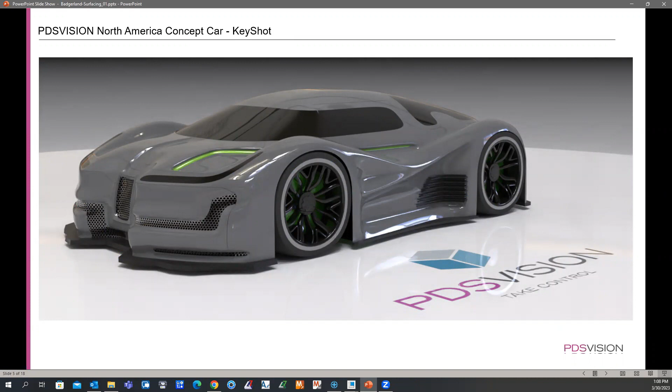This was developed by myself, but we are going to use this car model for the creation of material for workshops, potentially training in the future, presentations, a whole bunch of stuff. But this is the model developed within Freestyle. Here's a rendering of it within Keyshot. What's really nice is I have the plugin in Creo, so once I get the design in Freestyle completed and trim it out the way that I want, I could add the materials in Keyshot and give it this realistic look that you see here.

It's called Freestyle for a reason, because just like you've heard about freestyle singing and rapping, it's kind of like this fluid, intuitive thing where you're just trying to iterate and model off the cuff.

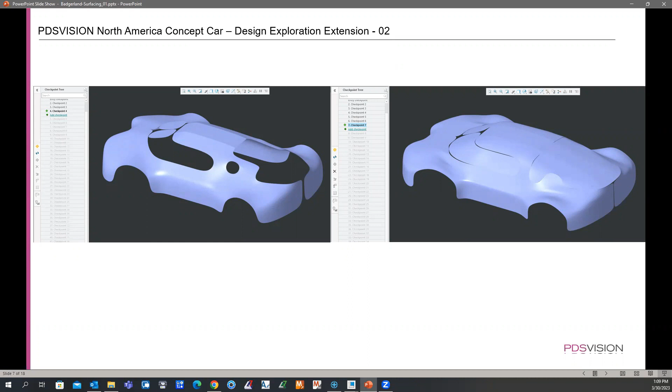So there's the next stage to the left, where I started to get an idea of what the front end and rear of the vehicle are going to look like, and the windows on the right side. You can see I sculpt it further, and the design gets more fleshed out as I go through pushing and pulling and modifying the surfaces. That's the finished one there to the right.

We know that typically, whether it was in the ISDX feature or just using curves and blends within Creo, we would create those curves first, create our patches between them with the boundary blend, then modify those curves to modify the shape. But in here, you're literally just selecting and dragging.

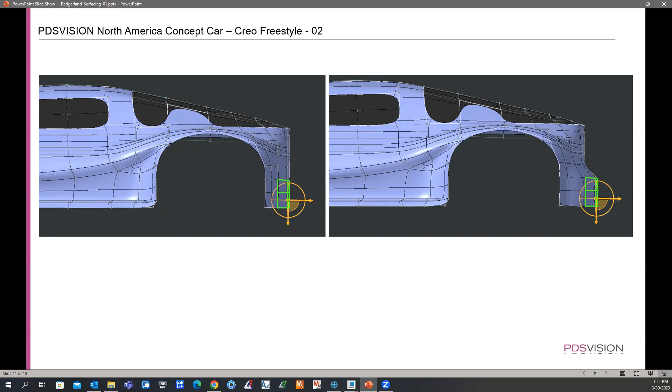Here's another example in that door area of the vehicle where we've selected a face on the left, and in the right image, we're using those drag handles again to push that inward to modify the shape there.

What's nice too is that once you've completed the shape in Freestyle, you can use those surfaces. So if I want, I can say, hey, I want to trim out that vehicle in the shape of the door there, and then publish it, so you can trim out the different parts of the vehicle or whatever it is you're creating.

And then if you want to modify that in a different part, for example in this part we call it door, we publish that geometry out, go back into that new part, and copy that geometry into the part. As you can imagine, it will inherit the original geometry from that Freestyle part.

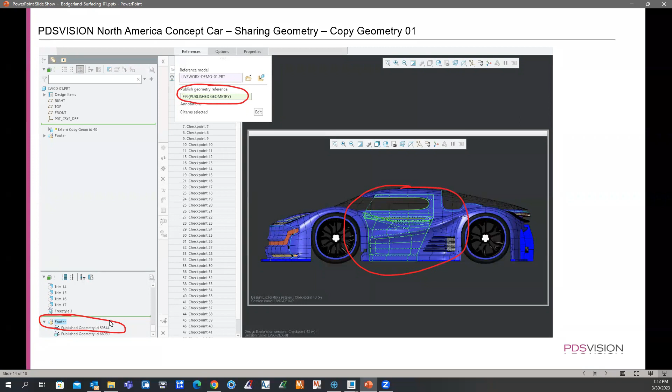At some point along the design development process, you may want to break that link, the associativity between this part and the original one. But at the top, you can see we copied in that published geometry, and we got it from the footer of the original model in the bottom left.

Once we've shared that geometry, you can see we can copy those curves from the Freestyle mesh. That copy geometry you see on the left side is what we use to get the boundary curves of the door. And once we have that, I can take it to ISDX if I want and flesh out that door even more.

So that's what I have right now, and I'm going to move into the demo to show you how that's done.

All right, so this is the CAD model of the vehicle right here that you can see. And also we have this design exploration session tree, and this is really nice because it can get annoying to do a hard save on different versions of a model. So you can see I've got about 44 of them.

I have the original one. If I go to checkpoint 2, activate that, click OK — that's what I started with. I started off with that cube in Freestyle. If I just go down the line here and activate these different checkpoints, you can start to see how that shape is evolving throughout the design process. There's another version of it. I'll just go to the last one here and activate that one.

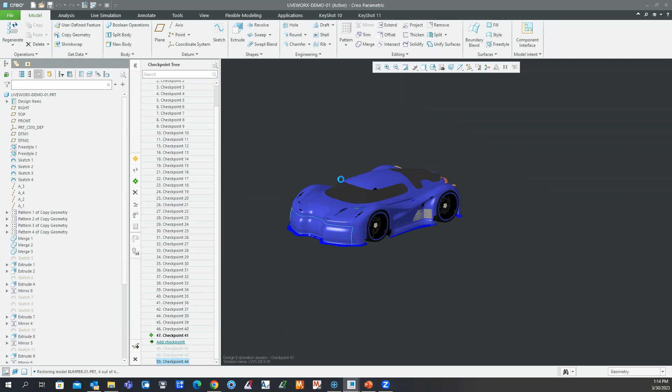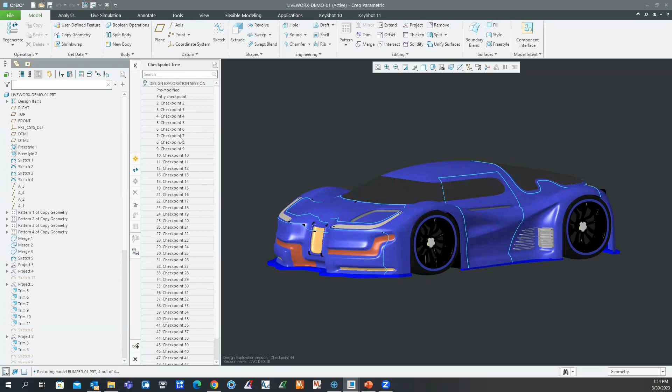What's nice about this is it gives you a free form environment, so you're not having to save different versions of the model. All the versions you've been working on are contained within this one part file. It gives you a more organic, free-flowing approach to developing the part, and it's easy to look at where you started and where you ended up. If you decide the product is finished, but there's a version of the vehicle where you liked the body even more back at some point, you can just go back to that checkpoint and start working from there again. So it's flexible that way.

So what I'm going to do is go right into freestyle and show you around there. I'm going to go back into the original checkpoint here. Checkpoint 2.

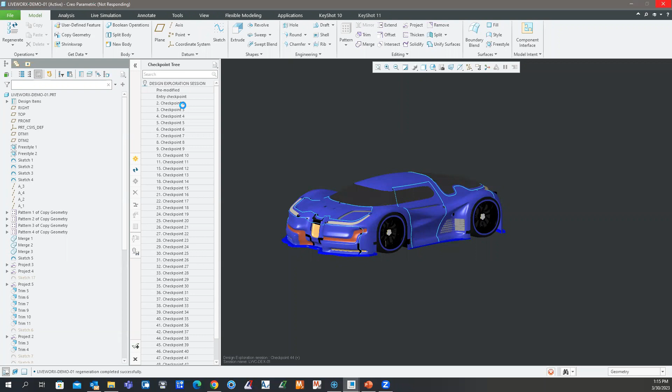So there's the cube, and that comes from this freestyle feature. Edit definition on that - this is the freestyle environment, pretty simple. We have our ribbon at the top, and we also have the freestyle tree down here to the left. You're going to start off with these primitive shapes. In the shapes group, there's the sphere, cylinder, torus, and we also have the cube. In this case, I selected my cube and started off with that.

Notice that when I hover my mouse cursor over this geometry, it allows me to select different parts - there's the face, the edge, and the vertices as well. Also notice I get these drag handles where I can translate the vertice, for example, select the face, rotate that face, spin it around.

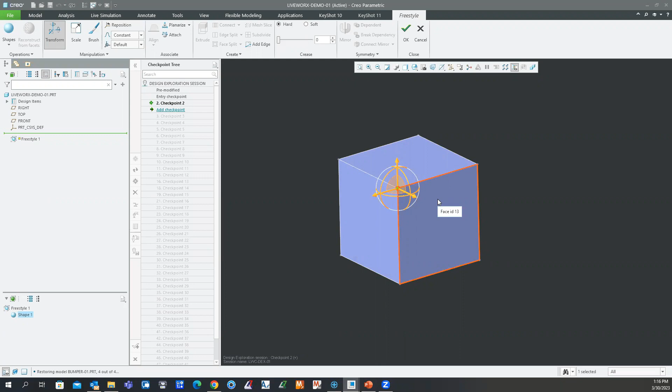We're used to creating sketches, modifying dimensions, that kind of thing. So for people that haven't used it before, this is a different way of working. But once you start playing around with it for a couple of weeks, you'll start to catch on. This is the original shape right here, and it's pretty intuitive and responsive as well.

If I select that face, I can drag that face out, for example. I can also extrude it - if I want to add geometry to this, I can right click and say create and extrude. Now you can see we've just added more geometry and subdivided the model even further.

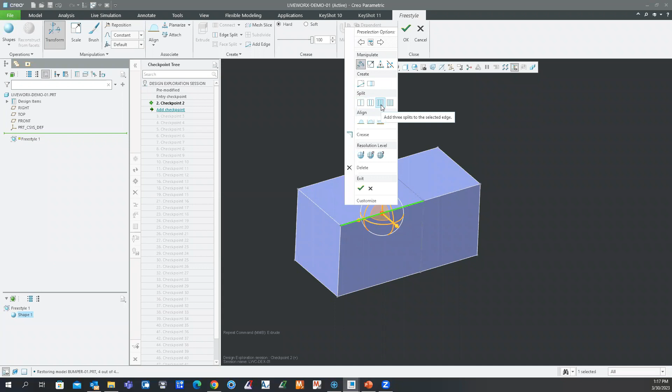I can subdivide it by selecting an edge as well. So there's extrusion, but I can also split the model further and subdivide it by grabbing an edge, right clicking, and saying split. I can split with one loop, 2 loops, 3 and 4 in this case. I'll grab 3 - now you can see we've subdivided that, so now I have more geometry to work with to modify the shape.

So I can grab that face there and pull it up, and see how easily I can start to modify that shape. I can split this side as well, right there, and I may even want to split it in this area. So I can grab that edge and subdivide it.

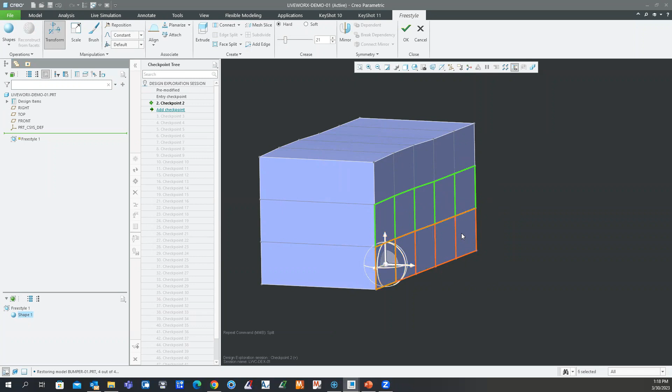Here's where I can start grabbing geometry - I can just grab these faces and start pulling that outwards.

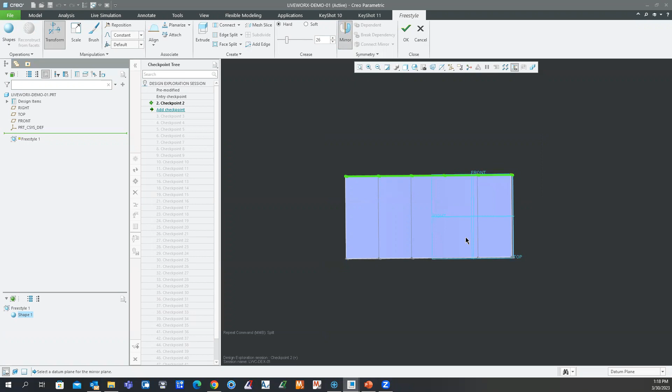Now there is a mirror feature as well. So what I can do is turn on my datum planes, grab one side of these vertices here, and then up in the ribbon there's a mirror feature. I can select that and say I want to mirror about this right plane. Now that I've done that, I only have to work on one side of the model, which really saves time. It's a lot better than having to try to mirror yourself manually - that would just take too long and be too hard.

So in this case, now I can grab these faces and start pulling that out, getting the shape that I want.

I can grab these as well, like that. And then pull the back.

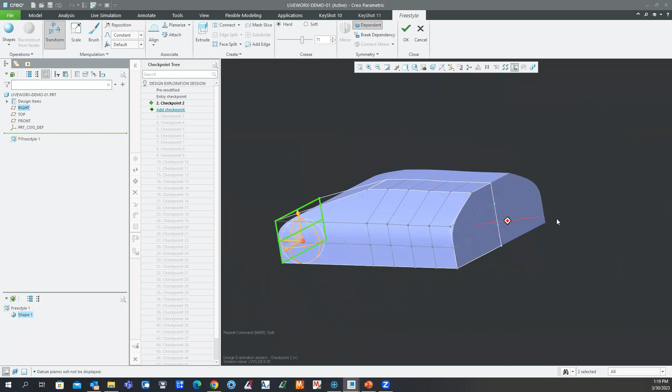I might want to subdivide this. There's also a tool where I can basically draw an edge in here, so there's the create edge between vertices. I can grab a point and connect between each one of the edges here with the edge I'm creating, then complete that. And now I can take this guy here, take these faces, and pull that out.

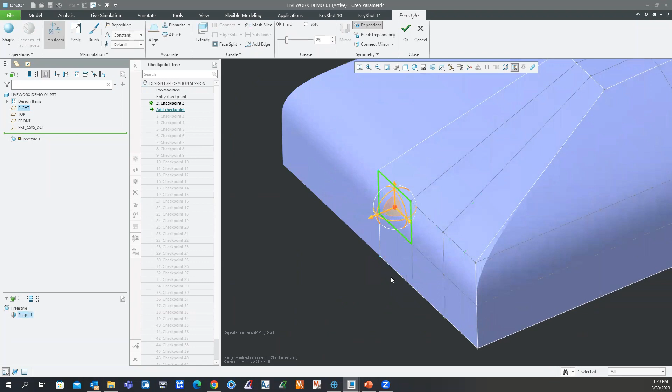So you can see here that you can quickly start to play around with the design ideas that you have for a vehicle, for example, or something. So I can grab this one and pull that out, right?

What I also like about this is the ability to connect and join geometry. So for example, if I grab this face and extrude it upwards, and maybe grab this one, subdivide that, and grab this face and extrude that, and maybe I'll just split these here. So let's subdivide that.

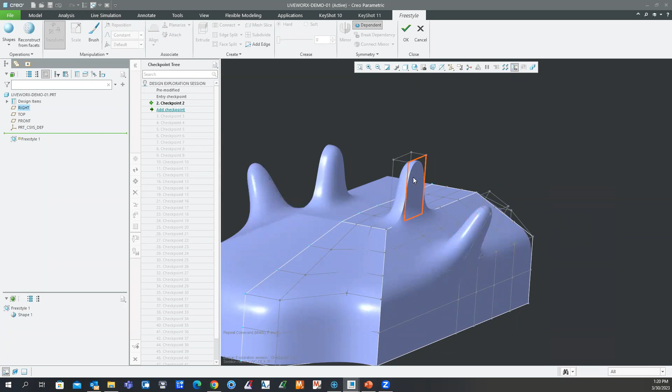Okay, so now if I wanted to join geometry, for example, from this face to this face, I can select both of those, right click, and say connect. All right, so that's very powerful. You can think about creating a handle or any other kind of geometry where you need to have this ability.

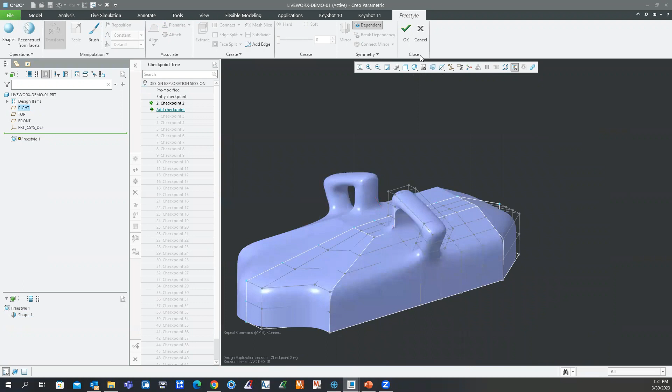One thing that I also like is the ability to merge or align geometry to sketches. So I'm going to go ahead and delete this one, and we'll go ahead in here and create a sketch. And I'll hide this one for now.

So a lot of people always ask, yeah, that's nice that you can sculpt, but is there any way to make it somewhat parametric? And I tell them yes. So that's what I'm going to show you right now.

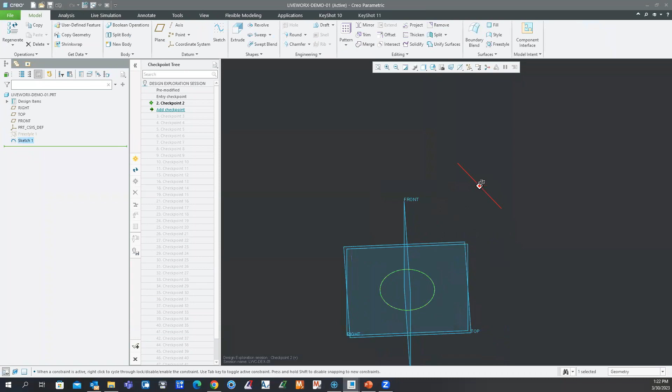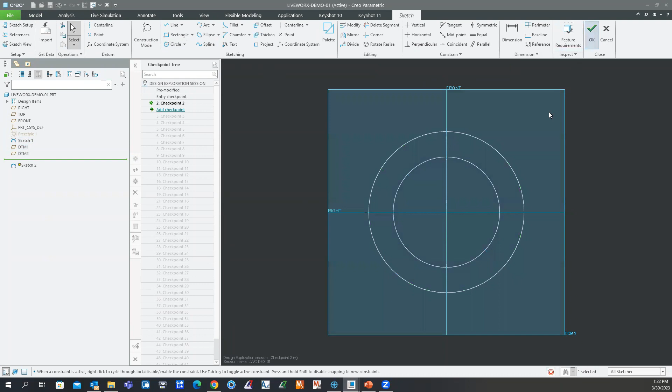Let's go ahead and offset a couple more planes. This will just take me a second. And I'll grab this last one here.

Okay, so if I were to go in here now and create a new freestyle feature, maybe this time, if I was to make a vase, for example, I could use a cylinder shape and rotate that around. Maybe I'll keep the bottom, and let's take this face and extrude that upwards to here. Okay, so I'm going to hide these planes.

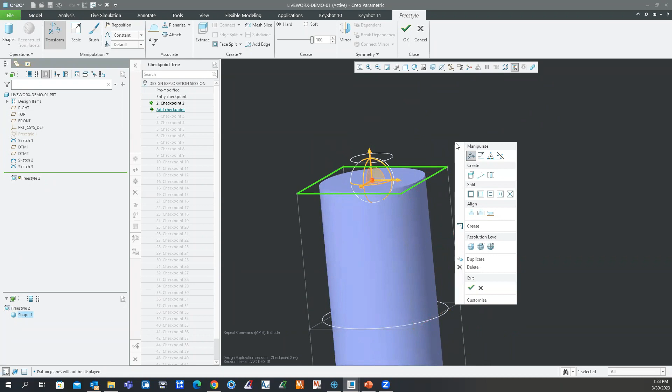So what I'm going to do now is I'm actually going to take this face and delete it, so now we have a hole in the top, right? So what's neat is I can grab all these edges and right click and say align, and I'll just choose the align normal here, and grab that sketch. Now you can see I've aligned that sketch or that freestyle mesh to that sketch, right?

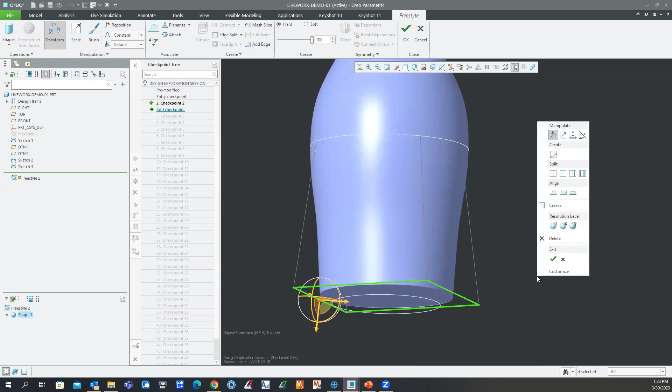I can do the same thing here. I can grab the edges and align it to that sketch, and change that to normal position right there. And then same thing down here, I'm going to grab these guys. Didn't like that one for some reason here. There we go. Okay, so there it is.

There's that vase that I've got here. So what's neat about this is now that I have that shape, I can go back in here to my sketches, for example, and modify these dimensions. So I'll grab that one, maybe change that to 80. And that mesh is going to update based on those changes that I make to the dimensions for those sketches.

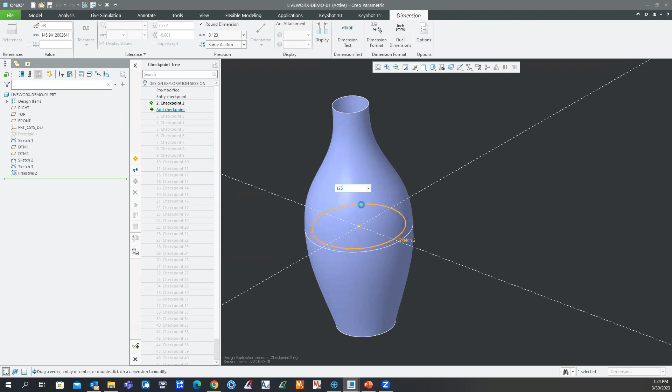And there's sketch 2, same thing here, and I'll change that to maybe 125. So just wanted to show you guys that you also have a little bit of parametric control there by linking the mesh to sketches. You can also do the same with planes: if you have planes that are offset, you can align the freestyle geometry to those planes, then if you modify the offset dimensions for those planes, the mesh will update as well.

Okay. So now that I showed that, I'm going to go ahead and get rid of some of the stuff here that I created. All right, I'm going to turn this guy back on.

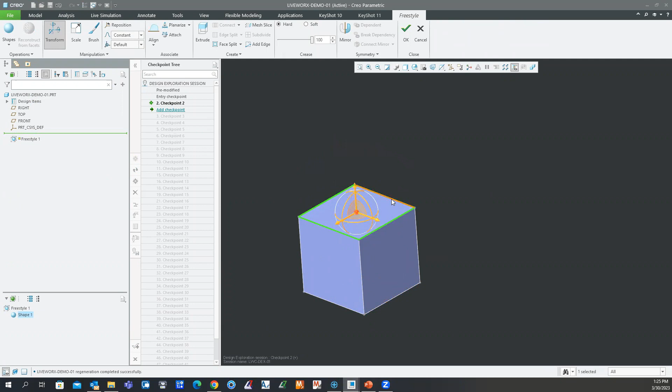Okay, so we talked about the primitive, bringing that in, selecting the faces and pushing and pulling. I can grab an edge as well, and push and pull that. I can grab the whole shape if I wanted to, and scale it, so I can right click and say, you know what, this needs to be smaller. And I can grab one face if I wanted to, or grab the whole thing, make sure it's uniform, and scale it like that.

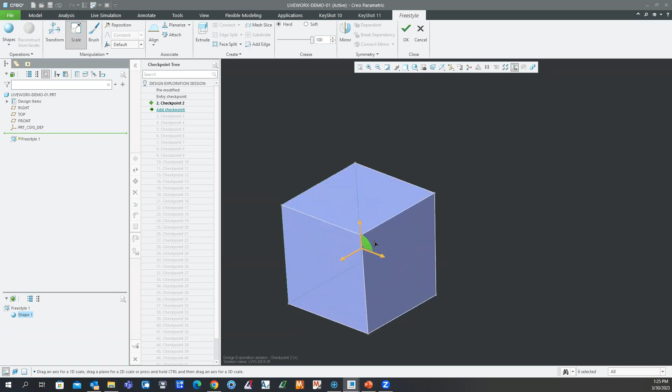So there's a lot that you can do here. I'm going to go in here and start sculpting a little bit more and pushing and pulling and subdividing here.

Now, one thing that's also nice is we have this crease option. So right now, it's basically showing the hardness of the entity. Right now I have 100% hardness for this edge, for example, and you can see it up there at the top. But let's say, for example, I select the whole thing and change this to soft.

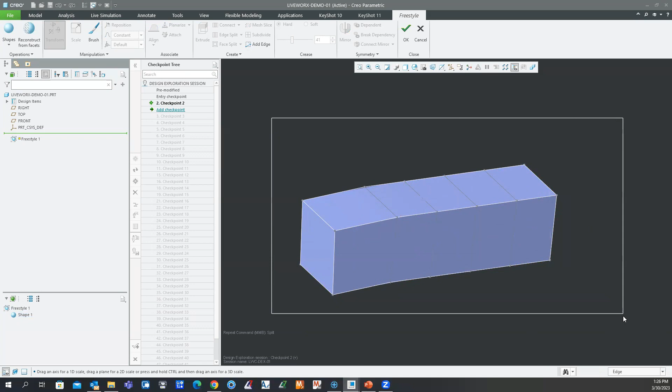Maybe I'll just do the edges for this one. So let me grab all the edges and make that soft, right? So I can quickly get that soft look as well. And when I bump it up here to 100, you can see that it's less rounded, right? So we have that ability as well.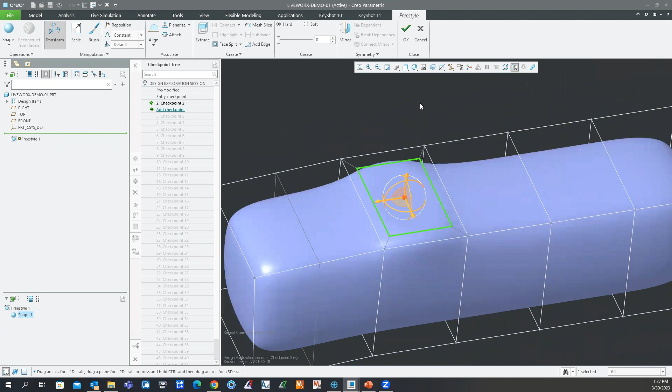We mentioned subdividing by selecting the edges and splitting like this, but we also didn't talk about splitting these faces. If I grab a face, I can also right click and say split. This is really neat. Say, for example, I wanted an indentation for a button or something. I can grab a face, split it, maybe split again, and then from there I can translate this downward and I get that dimple right there. So that might be a recessed spot for a button, for example.

You can also put a hole through this if you wanted to. So for example, I can grab that face, and I can actually grab two faces, the top and the bottom, and subdivide both of those. So let's split both of those there. And then what's neat is if I right click and connect, it's going to put a hole through that.

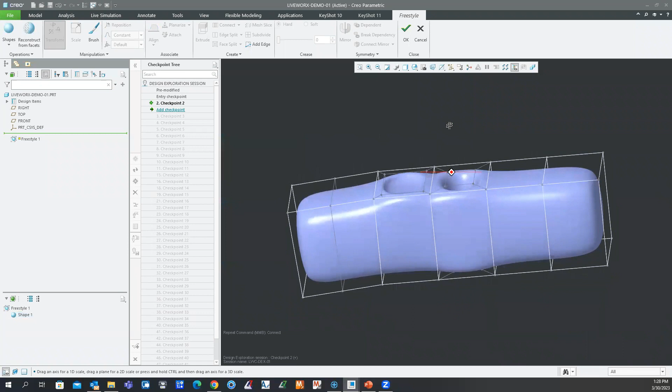So again, the idea is that you're using this tool for the ideation process, for the concept development process, where you need a quick way to start creating some forms to get an idea for your product. And this is a very quick and easy way to do that once you get accustomed to using the tool. Of course, it's not easy at first, but with some time to play with it and get used to the tools, you can see it's pretty effective for creating these very complex shapes in a quick manner.

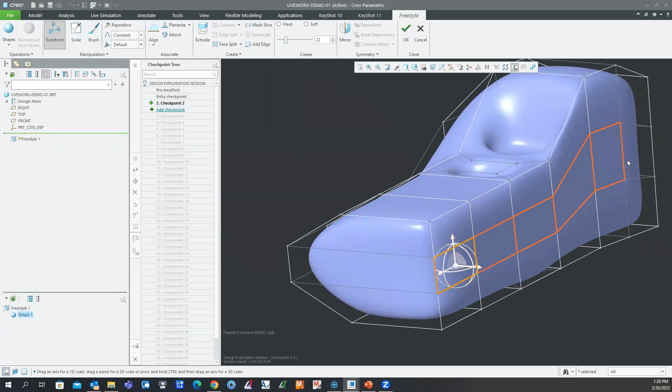Now, I'm going to cancel this and move to a different stage in the process or in the design of this model. So this is the vehicle that I started to create here.

I'm going to go ahead and go into this freestyle. So this is a different stage of the freestyle surface development. And here you can see I can start to get creative with what this door looks like.

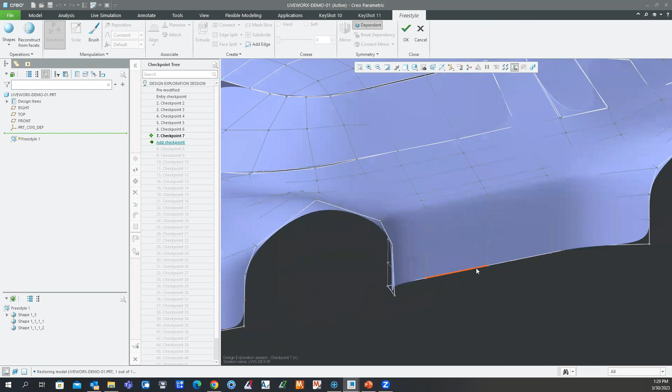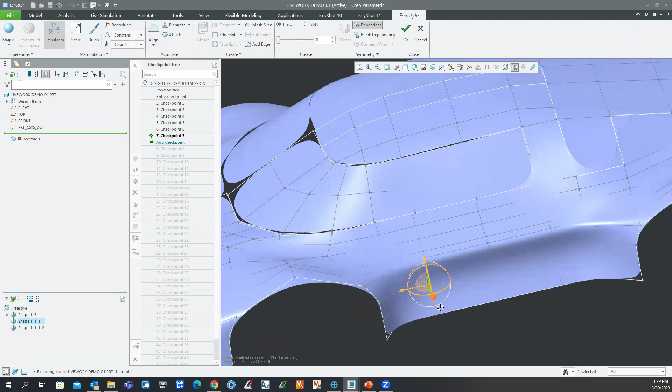So maybe there's some venting here by the rear wheel, and I want to take this part of the vehicle, select those faces, start to move that inward a little bit. And I can have it taper, so I can bring this edge back out maybe, and say, hey, you know what? Let's gradually have it start to recess as it goes closer to the rear wheel there. So I'll pull that one back like that.

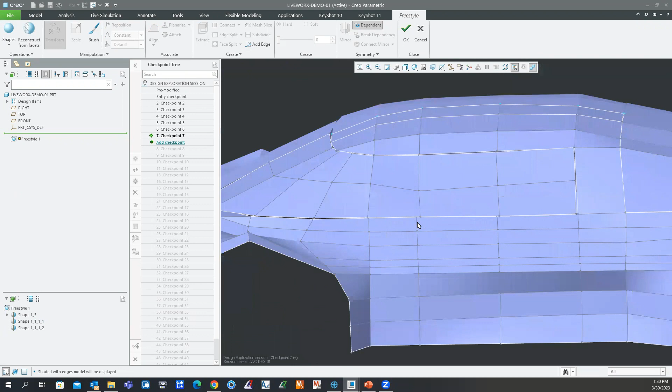Okay, now what's nice, what I also like is, so right now we are in this smooth mode, but there is a different mode right here, which is called box mode. And that shows you what the surfaces look like when they're not smooth. This is a real nice way to align the vertices. So say, for example, this edge loop right here isn't aligned with the edge loop of that window. What I can do is I can grab the whole...

You just grab these and then I'll zoom in and grab these, right? So maybe they're not exactly aligned where I want them. I can then take this drag handle and shift it. So when I shift it over here to the right, now I'm going to zoom in and it's aligned. It's getting there, right? It's aligned to where the window is.

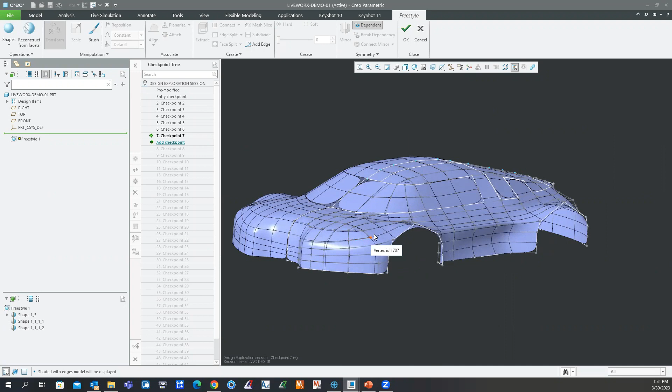And once your product starts to evolve and you have more geometry, the more faces or tessellation that you have in the model, sometimes it'll behave a lot more slowly and it won't respond as quickly as it did before when there was less geometry. So if you really need to make a quick adjustment and you don't want to wait for any lag time, you can also go to this box mode and make changes here, then turn it off to see what that change looks like once it's smoothed out.

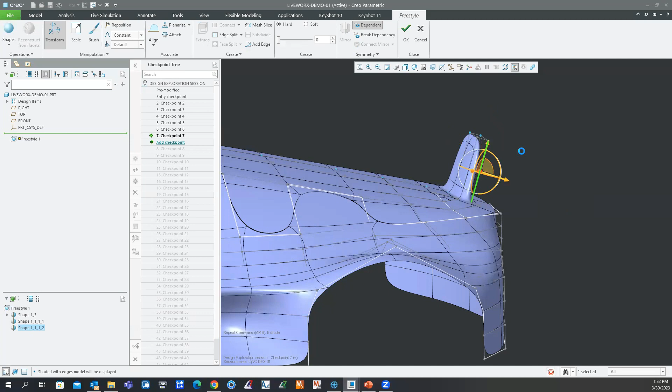So you can see here how quickly I can start to make changes to this model here. Then maybe if I want to start playing around with what a spoiler would look like in the back here, I can start to grab some geometry and extrude it up like that. Maybe subdivide here.

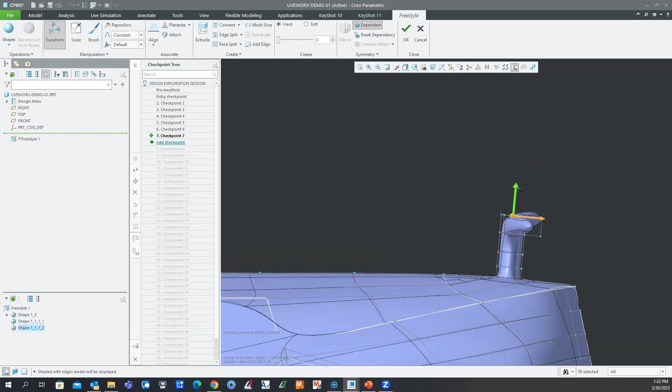And extrude. Then of course we have to grab some of this stuff and I can grab that face, bring that back here. So as you can see, it's great because I can start to model really quickly and get an idea for the vehicle as far as what's coming up as I'm designing it, because there are things that just come up on the fly when you're designing. If you don't capture that idea quickly, you may forget about it. So this is a nice way to start thinking about those things and being able to model it quickly. Extrude that.

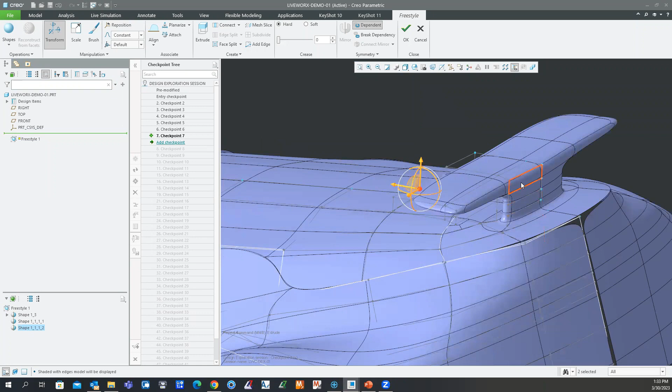Yeah, so that's just something I thought about off the cuff, you know what I mean? So obviously this isn't going to be exactly what you want, but this car is kind of futuristic in a way, so just think about some ideas there.

And then same thing with the front end of the vehicle, right? There may be a design that you have in mind for the grille or the air vents down here. You can take this stuff, select that, and I can inset it, and say, hey, what would it look like if I took that geometry, subdivided it, started to kind of pull that back a little bit, right?

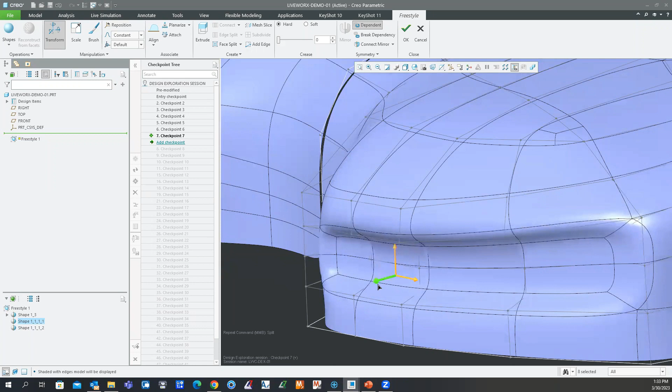So there's that. Okay, so now, I probably should have canceled and not clicked OK, but you know what happens in a demo sometimes here.

So I don't really want that change, so I'm going to go back. And I do have a lot here in the design exploration session, so it may take just a little bit of time here to undo that.

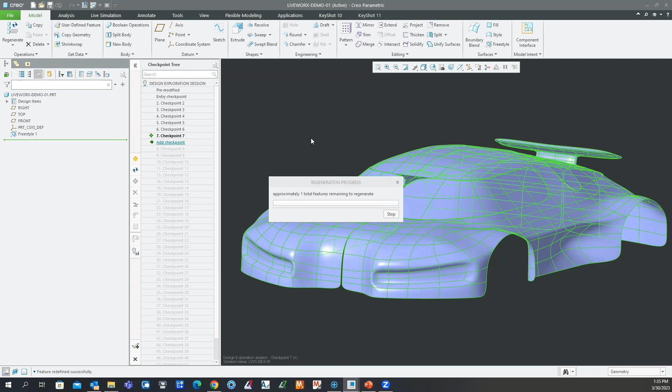Okay, so here we are. All right, so I'm going to go back to the end of the session to get to the final version of the vehicle here and just kind of show you what I did to share this geometry now.

Okay, so what I wanted to do now was start working on the design of the door. So if you go to the model intent group here, go to publish geometry, you can select the geometry that you want to publish and share into a new part, for example. So I can select all these surfaces, then click OK, for example, to share that stuff. I've already done it, so we don't have to do it now.

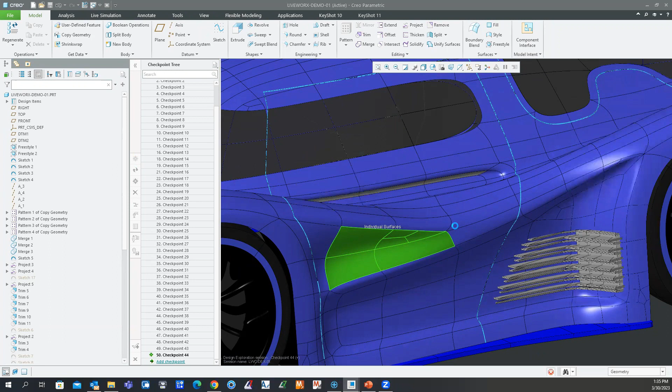If I scroll down to my model tree here at the very bottom, there's the footer, and you can see if I select that publish geometry ID, it's going to show you that it's also selecting here in the graphics window. So you see the green there for the door. So once I publish that, I create a new part file, okay?

And I'm going to go ahead and go back in time here, and you'll see there's this external copy geometry feature. All right, so this feature was created when I copied that geometry in. So if I right click on this, and to do this, I went to the copy geometry feature up in the ribbon at the very top here in the get data group.

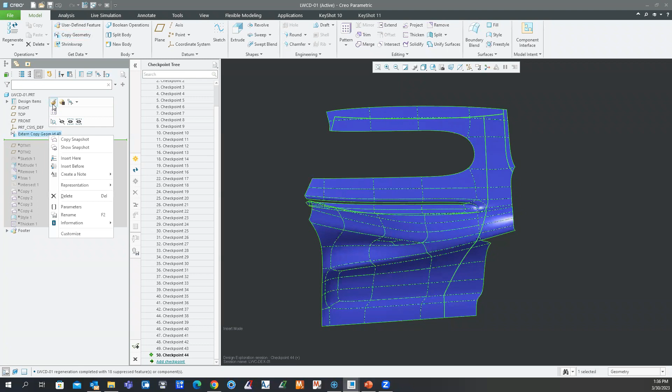But I'm going to go back into that feature, edit definition, kind of show so I have that LiveWorx part right here, but I actually broke the association. So I broke the link between the original freestyle car and this part right here that I created. So originally there was a link there, and you can see that there's the LiveWorx demo part. And then we also have the published geometry feature that's no longer there. That would show up there normally, but it's not because I broke that link, okay?

So now I'm gonna go ahead and get to this point. So the door was copied into this part. So this geometry that you're seeing actually came from the freestyle mesh, okay? And also notice that in the model tree, I have a copy feature here, which is basically the edge of the freestyle mesh of the door here that you see highlighted in green. So there's copy 1, copy 2 on the right side, 3 up here, and 4 here.

And the reason why I did that was because I wanted to recreate the door with the interactive surface design extension, also known as a style feature, right? So up here in the ribbon, in the surfaces group, there's style, okay? And I'm going to show you that here.

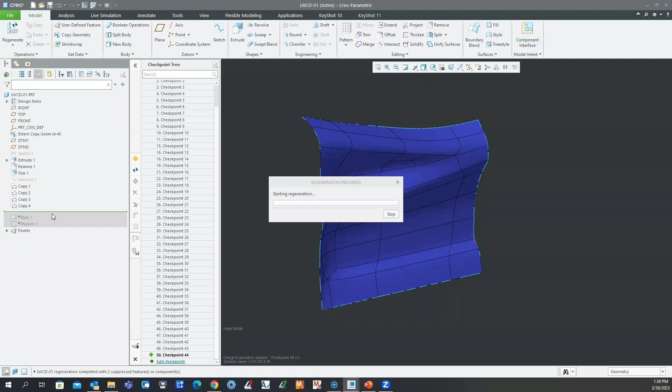So I already kind of have some of that fleshed out. I'm going to hide the external copy geometry that I got from the original freestyle car. And this is the geometry that I created in the style tool, right? So I'm going to hide this for now.

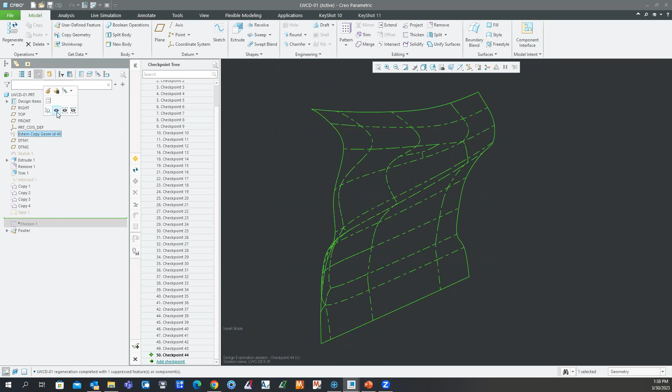And turn the external copy geom feature back on to show you kind of how I was thinking about being able to work on it. So this is the geometry from the freestyle mesh.

And then what I can do here is go into the style tool and start creating curves on top of that mesh, right? So this environment is really cool, it's basically another surfacing environment, but it's self-contained in a feature. So when I create my curves in here, my curves and surfaces for the door, and I click OK and I exit out, it's going to show up like this as one feature in the model tree.

So it's really cool in that way that you can have a ton of curves and surfaces, but you're not going to overpopulate your model tree. It's all going to be contained in this one feature. So that's pretty powerful.

So I'm going to go back into the style feature now. And what's nice about this too is anybody who's used Rhino or Autodesk products for surfacing can see that they typically would have this 4-view layout that we don't have normally in Creo, but we do get it here in ISDX. So when you're modifying curves, you can see what that modification is going to do in these different views, in the isometric view, side view, top view, front.

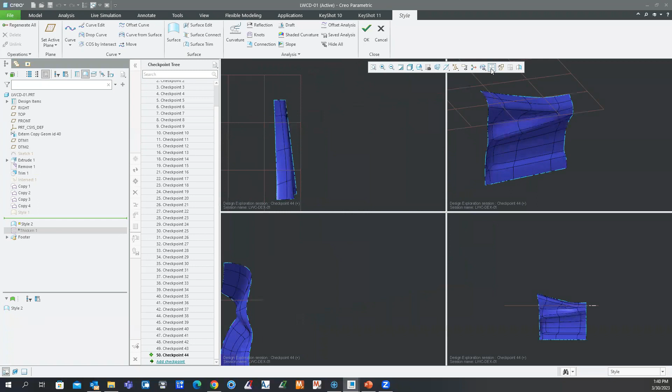So I can turn that on and off, which is real neat. And then I have my style tree here to the bottom left, and I have my ribbon at the top. The nice thing about it is it's pretty self-explanatory. It really has your curves up here, your surfaces, and then you have some projecting, which is the drop curve, for example.

There's curve by intersection, so you can intersect the surfaces and get a curve from that. But what I'm going to do is utilize this freestyle mesh to create surfaces, and first to create curves in the style tool here. So I have the free curve selected.

So what I'm going to do is grab this boundary edge right here. And what's nice is even though I'm starting, you can see I have to hold shift and snap to that curve—I'm starting on that edge of the freestyle mesh. But if I hold shift and hold the left mouse button down, I'm going to get that square. And that square tells me that I'm now creating a point on the surface of that freestyle mesh, because I want to match as closely as I can to that design.

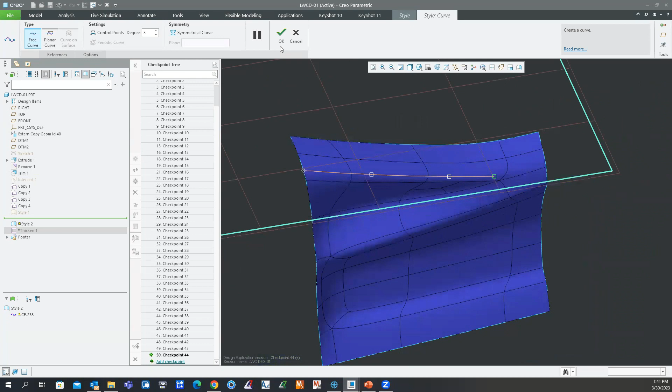So there's one point, and I'll create another point there. And again, this is on that mesh. So there's the curve. You can take a look at it, you can see that it basically follows that surface. And I'm going to go ahead and create another one, or I may want to just continue a curve off of this curve.

So I can grab that endpoint, hold shift again and get that square, which means I'm on the surface. Grab that guy. And what's nice here too, like you guys have seen before within Creo, is I can adjust the tangency of this curve. So right now you can see that I don't have any tangency really between the new curve that I just created and the first one that came before it.

So I can grab this endpoint, we first edit on the curve. I can grab this endpoint and right click and say, let's make it tangent to that line, or maybe let's make it curvature continuous to that line. So we do have some freedom to do that. And I can also pull back the tangency length as well, if that's too much, I can start pulling that back.

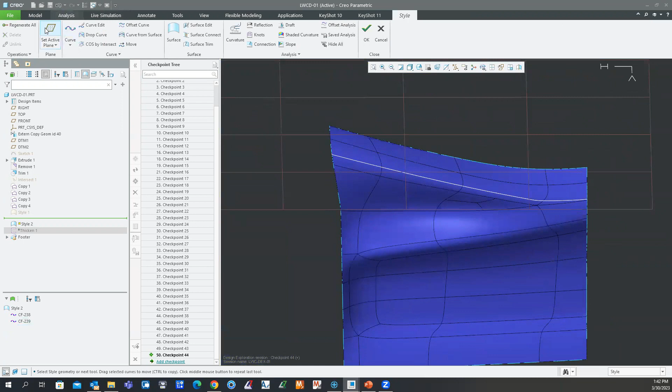Okay, and then what I'll do is I'll come in here again and start to flesh this out even more. So I'm going to grab a point here, for example, and again hold shift and the left mouse button. Start snapping on that surface, here as well, like that. And I may just continue this thing all the way to the edge, like this.

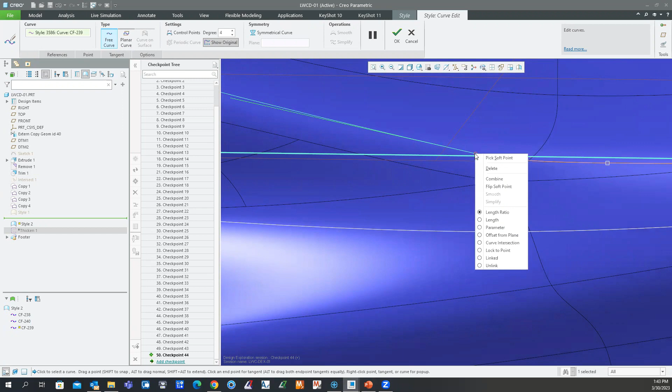If I want to, I can also grab that point, right click and say, I don't want it to be its own curve, I want to combine it into the original curve, so we just have one curve and not two there. So I can right click, grab that point, right click and say combine. And now it's combined with the original curve, and it's all one curve now, which is pretty cool. I might take these and move this around a little bit.

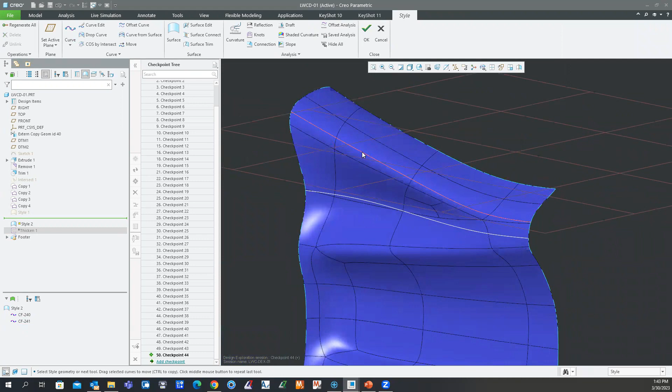Okay, so now that I've defined those curves, I may want to get the curves that go perpendicular to those. So I can create more curves here, maybe one here and here like that.

If I want to add more points along the curve as well, that's easy to do. So if I'm like, I really need another point, I need a midpoint of that curve to snap to the surface to make sure it's aligned correctly, I can do that. I can right click here and say add point or add a midpoint, and then grab it, hold shift, and snap it to the surface.

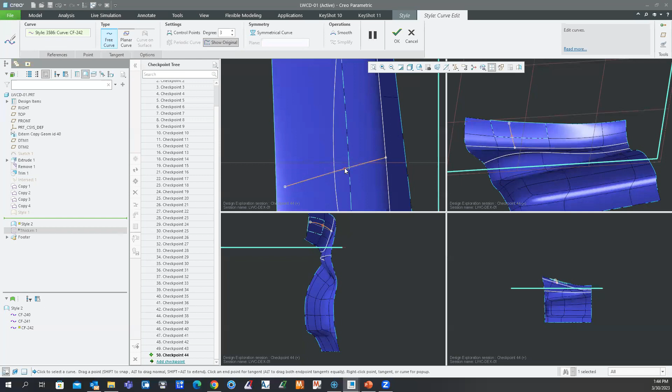So it's aligned there. And again, I may want to use the multiple views to go into my top view and adjust that, to make sure it's lined up correctly.

Then I'll come down here and create another one. I'll grab this guy here, snap to that endpoint, and then snap down here, right click, edit definition, add another point, and then snap that to the surface.

So you can see it's a really quick way to start creating these curves. I can grab these soft points and move them along the edge. It's still on that edge that I created, so I can drag that point along it.

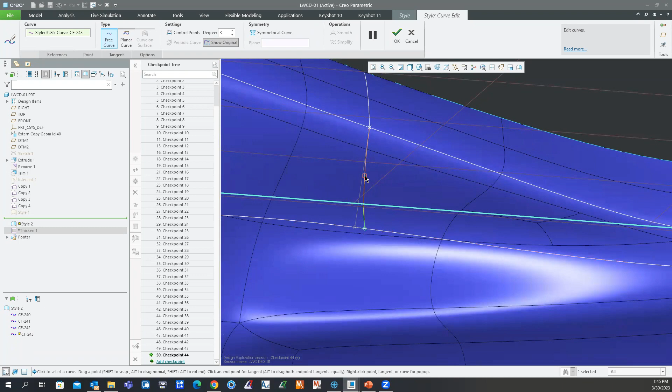Now again, I'm going to have to adjust that tangency there at that point. So I'll grab that endpoint, and maybe make that curvature continuous to that, and then pull back that handle a little bit to decrease the length to where I want it.

All right, and then I'm going to go in here and create one more on this side. So I'll go to my curve, create one here, like that.

That should be good. And I'll create a new one here. Let me adjust that tangency again, like that, and pull it back to where I want it.

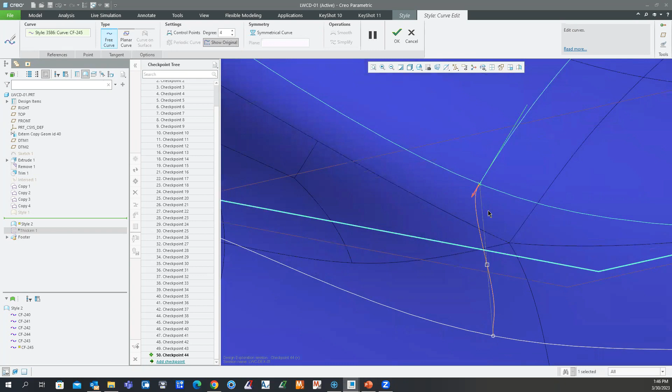This is going to need some more work, but the nice thing is that I can always come back in here if I need to and start to modify these curves and adjust them and get them where I want.

So now that I have that, what I can do is create a surface from the curves that I created. I can grab the boundary curves here. There's also this internal chains collector here. So once you grab the boundary for the surface you're creating, you can also grab the internal chains to help articulate the shape even further.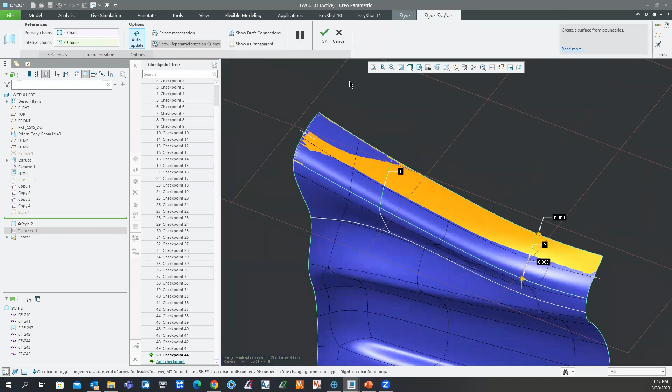So there's the surface. You can see it closely matches the original freestyle mesh. If I hide that freestyle mesh, you can see just that surface created in the ISDX tool.

And then same thing with that next surface. So I'm going to hide this freestyle mesh and then come in here, grab my surface feature, grab my curves, and then grab these internal curves here as well. I can change that curvature if I want to.

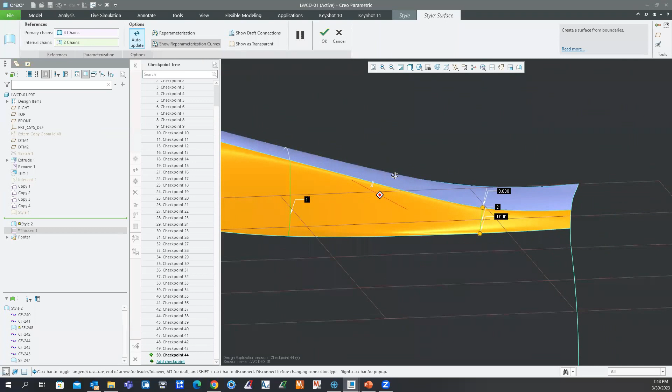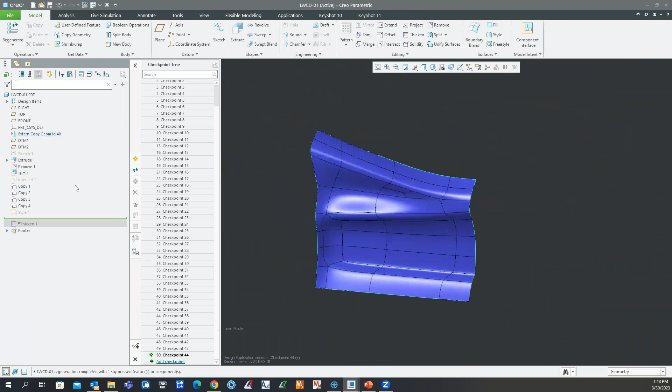So you can see how quickly you can start to flesh this out and how quickly it's going to match. Now that I've shown you this, I'm also going to move to one that's a little bit more complete than what we have right here. So I'm going to transition to this style feature.

And you can see that a lot more work has been done. If I hide the freestyle geometry, take a look at the surfaces that I created with the ISDX feature.

Now, one thing to note is before, remember that we were snapping the points to the geometry of that freestyle mesh, but when we're doing that, we're also creating an association. We're creating a parent-child relationship between this ISDX surface and the original freestyle surface.

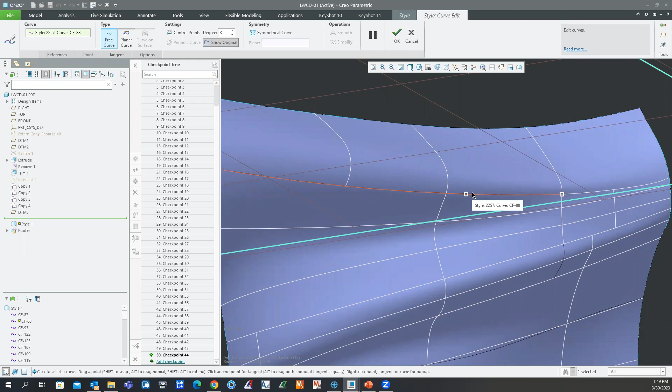If we don't want that in this area, what we can do is select these square points that we're seeing here, right click, and say unlink. So right now it's linked to the surface, but if I want to unlink it, I can come down here and say unlink, breaking that parent-child relationship between that point and the freestyle surface it was attached to.

So anywhere on here where you see these squares, you can select them, right click, and unlink those.

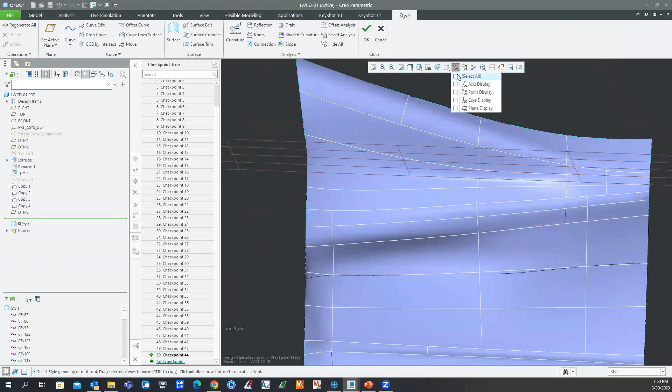If I want to create a cut here, I can do that as well. So if I grab a datum plane here, for example, let's actually make that the active plane. If you want to sketch on a plane in the ISDX tool, you can say set active plane, select that plane, and then choose the planar curve creation and start sketching.

So there's one right there. There's one here, and we'll create a couple more as well.

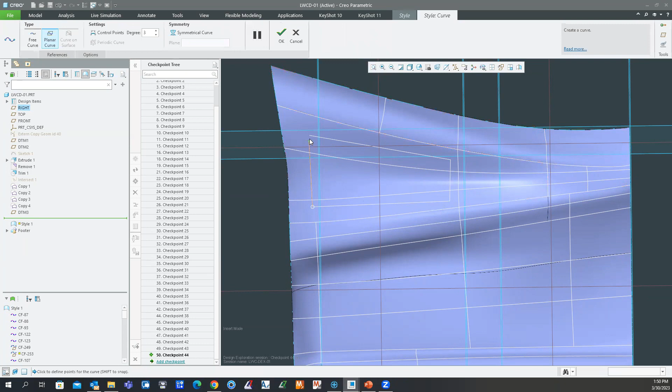And like that. Okay, so now you can see that shape is on that back plane.

Now I can go to the drop curve feature, select my curves back here, and then select the surfaces I want to project onto. So I'll grab that, and then click OK.

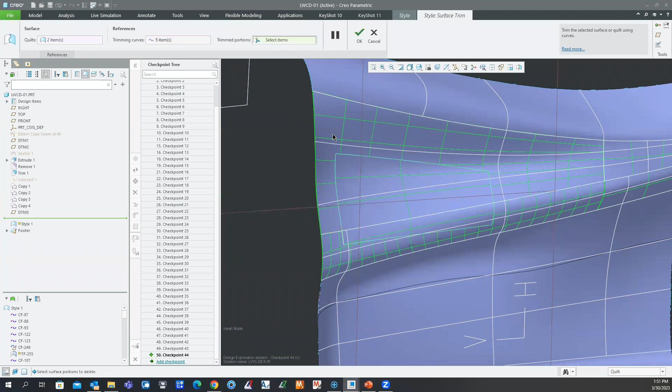Once I have that dropped on there, you guys can probably guess what I'll do next. I can go in there and trim it out. So there's the surface trim right there. It's going to ask me for the quilts to trim, so I'll select these, and then ask for my trimming curves. Then it asks for the portion of the surface I want to remove, so I'll grab both of those and click OK.

All right. Bill, it's Deb, just watching the time here. There were 2 questions in the chat. Sure, let's see, I can't quite see them.

Why are we recreating the freestyle surface in ISDX? And then, well, I don't know—can you see the chat so I don't have to read it?

Oh yeah, sure. So freestyle is just for conceptual work. Then you come back with ISDX or standard Creo functions to make the real geometry. You could work that way, but you can also use the freestyle mesh itself—you can trim it, thicken it. So yeah, if you're able to get a quality surface from freestyle, you can use that for manufacturing.

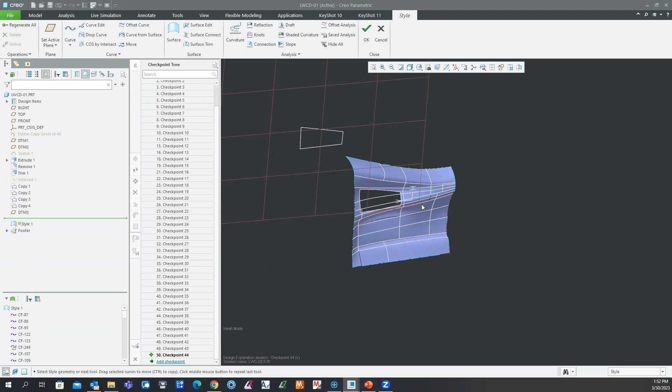I just showed recreating the freestyle mesh with ISDX to show the functionality of being able to create curves on top of a mesh. Maybe you find a design, or somebody sends you a design and you import that in as an OBJ or something, and you want to use that mesh as a reference for creating other curves and geometry. You can do that. So just showing you a different way of working.

You can manufacture from freestyle surfaces. I'm not sure, as I have not used freestyle for that myself, but yes, you can manufacture from them.

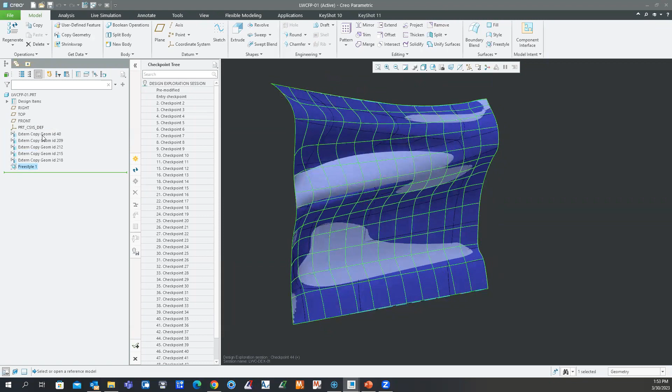So if I go ahead and click cancel, you can see this is ISDX—there's my thicken, so there's my surface there. But if I switch to this part right here, you can see I basically have a freestyle mesh created here, and I can select that mesh and thicken it, right? So there.

Once you get this thing trimmed out to where you want it, you can thicken it and manufacture it. So yeah, you can most definitely use a freestyle mesh for manufacturing.

All right, any more questions?

It's just more commonly used for concept development because of the speed in which you can work. But yeah, there's a lot you can do—I can trim this out if I want to and do all kinds of things to make it work for me.

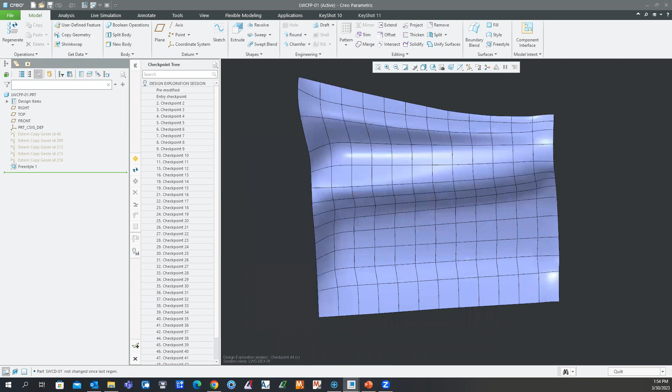There's a bumper design—this is a freestyle mesh of the bumper area. So if I go here and insert this, this is published geometry from the freestyle mesh, right? Front bumper.

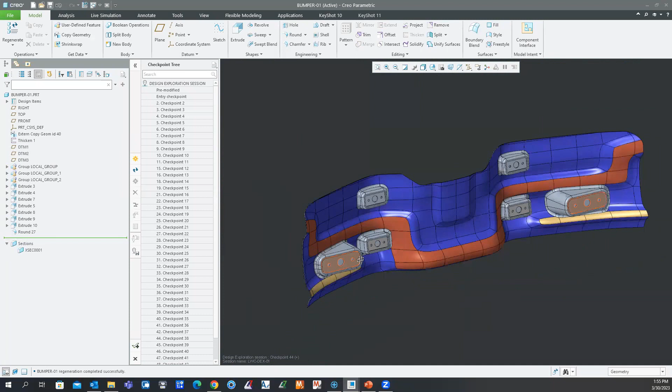If I want to, I actually added a mounting surface in the back of this, so there's multiple plates in here for mounting and all that. So there's a lot you can do with the freestyle surface—you just have to get used to learning how to use the tool.

All right, Debs, that brings us to about 5 minutes before 2.

Yeah, sorry, I just saw somebody mention intake, exhaust, manifolds, air boxes, that are sandwiched between other components.

Yeah, exactly. Kind of like before, when I was showing you creating that vase lofting between the sketches I created in Creo, I could definitely see a use case for that. I know we had somebody in training years back who took an intro class but was curious about freestyle, and when he saw how easy it was to link the freestyle mesh to the curves, he said that would be a great way to create the exhaust for the motorcycle he was working on. So I can definitely see it used for that.